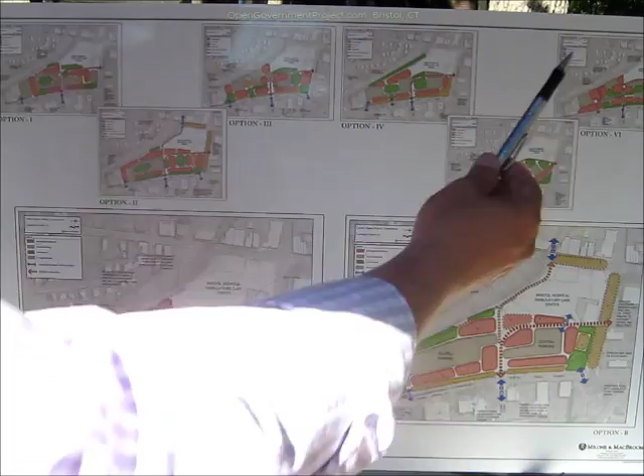As we worked through the 6 concepts and heard back from the community, we learned that 3 of these options—option 6, 5, and 2—were really favorable. We worked to consolidate elements from those options and broke them down into 2 further options, option A and option B.

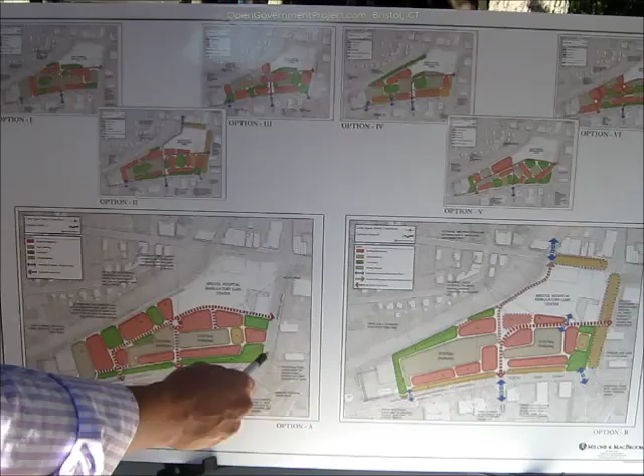In option A, an access road moves vehicles and pedestrians through the site, with building development centered around parking areas that could be used for food vendors, food trucks, and future farmers markets, all surrounded by building elements and a public plaza with green spaces anchoring the corners, with linkages to Brackett Park and further north along North Main Street.

Option B looks at 2 center parking lots that would be used for public parking as well as tenant and retail parking, with buildings along North Main Street to create that frontage, green spaces on the corner and in the northeast portion of the lot, as well as buildings up by the future Bristol Hospital Ambulatory Care Center.

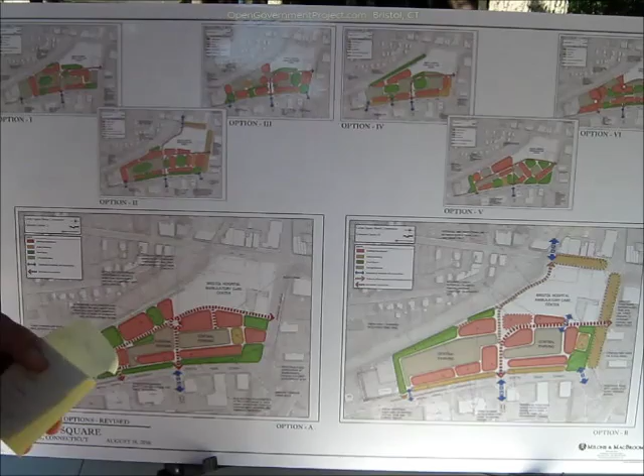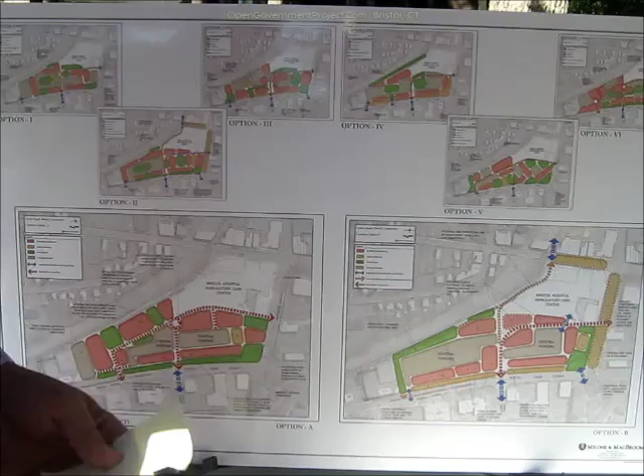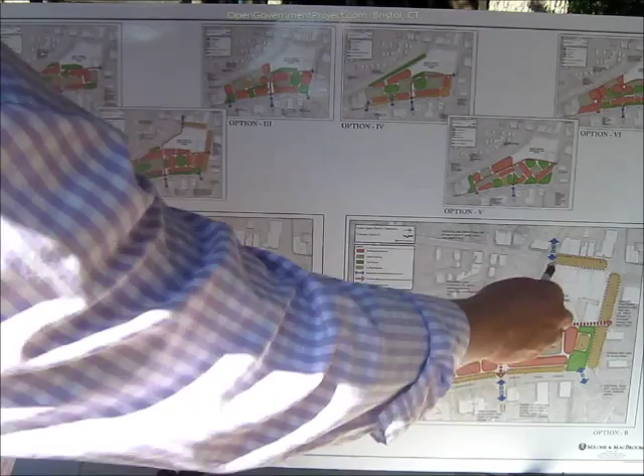Option B varies from option A in that these concepts look at street diets or streetscape improvements, road lessening, especially along Riverside Avenue, which is currently 6 lanes. We're considering narrowing that down, since we know the car counts don't require 6 lanes. And most importantly, off of our access trail, a pedestrian link connects municipal buildings up to Main Street and then down to the 4-way intersection.

From these concepts, we've moved into more realistic development options. From the bubble diagrams, we really want to look at parcelization and small development options. It's unrealistic to think that a developer may come in and want to develop the entire site, which we have seen before. These conceptual diagrams show phasing represented by color.

Option A, taken from the bubble diagrams, and option B as well, show smaller development coming in phases, with option A phase 1 being the initial access road with open green space for public events. The existing parking for usage over to the municipal buildings remains, and in orange, development comes in phases, with the green space remaining for public use.

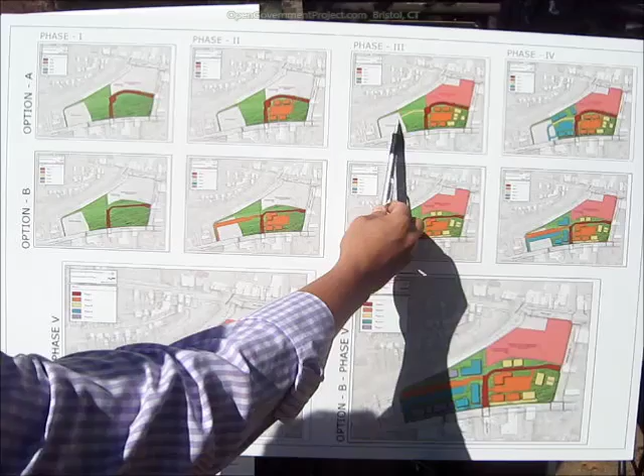Development continues with a public plaza and additional buildings, and the access road connecting the existing parking. In phase 4, blue development comes in to really consolidate the entire site, and then moving into the final build-out in purple, where the entire site is used, keeping areas of green space for public use.

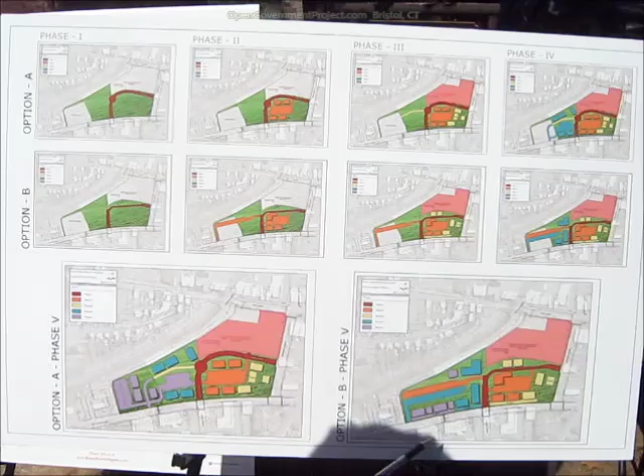Option B is very similar with a phased approach, moving into a final build-out that, as in Concept A, keeps existing parking for access to the municipal buildings. In both phases, pink represents the future Bristol Hospital Ambulatory Care Center.

Bubble diagrams are a great tool to allow us to really conceptualize building massing and uses of the site. But looking at things in more realistic terms on a 3D level really helps us understand what the site will look like as buildings come in.

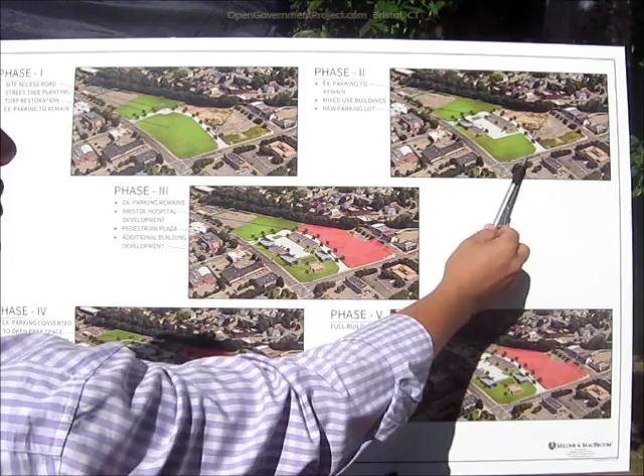Phase 2, we see our new parking coming in off of our access road with our new development buildings coming in. The idea that cars would come in and park and use the site, walking on the sidewalks, using the existing green space, is really a tool to help developers realize that boots are on the ground and there's people using the space.

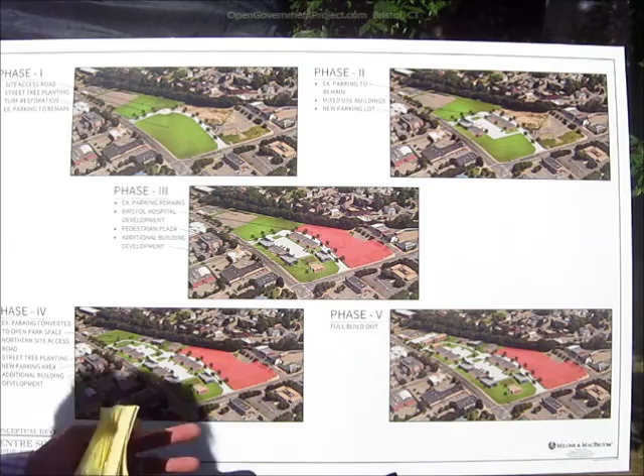Phase 3 identifies Bristol Hospital coming in and new employees to the area that will be looking for some place to eat lunch and to use green space during their lunch breaks. Additional buildings come in with our public plaza space.

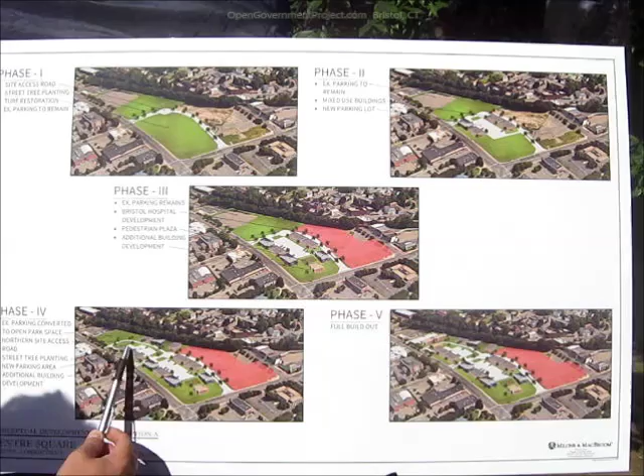As we move into phase 4, our existing parking is converted into open space with our northern access road accessing the link between Riverside Avenue and North Main Street. Additional building development and parking increases the feel of a downtown network.

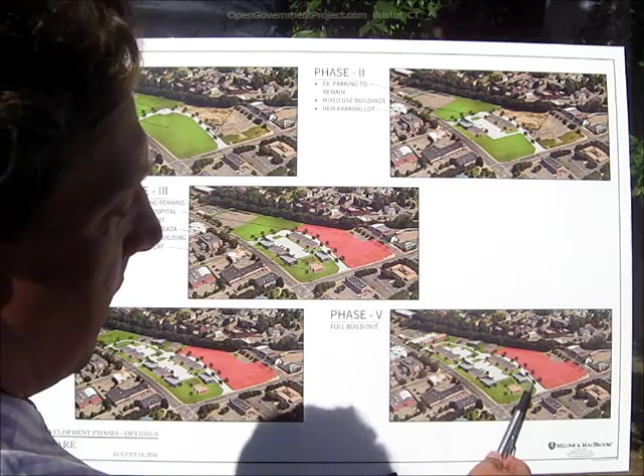And in Phase 5, we have full build-out with new buildings coming in, parking for access for the municipal buildings, as well as tenant parking, new parking along the center core, hidden by buildings, so that when you are driving North Main Street and Riverside, you don't see a large parking lot, but you see green space running along the entire corner, as well as people in the public plaza.

As we continue working through the public engagement process, we've just gone through our phases of development, to full build-out, but we need to hear from the public, and we presented some options on what can happen in these green spaces. As I've mentioned before, getting people to use the site, which is currently not being used by pedestrians, is really a priority.

And so there are options that as development stages progress, open space areas are developed and maintained by the city for people to get out and use the lawn spaces.

Farmers markets are an excellent option for areas with future parking as well as existing parking, and the possibility arises for 4-season use. Cross-country skiing lessons, Christmas in the park, Christmas tree sales, as well as temporary ice skating rinks are all possibilities to get people using the site in the winter.

Pop-up theaters in the lawn, as well as temporary drive-ins, get people using the site not only during the day but also at night. Autumn time hay mazes,

as well as sculptural features, mum sales, pony rides, pumpkin sales are opportunities, again carrying us from the summertime activities into autumn, into the wintertime.